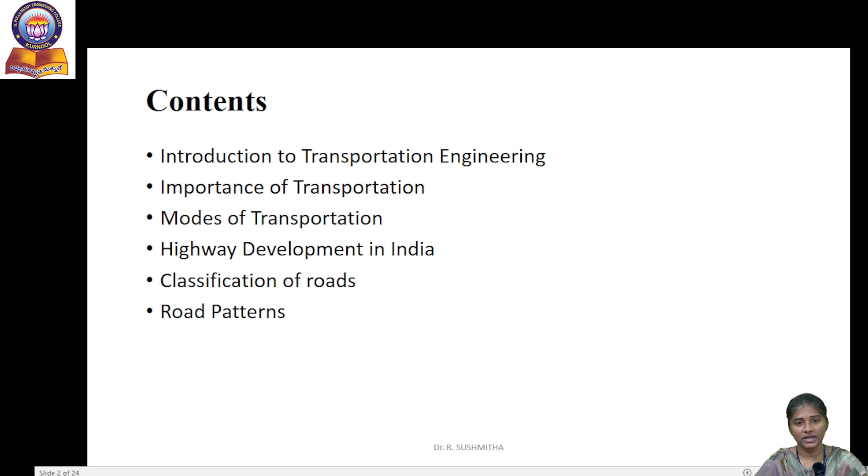These are the brief contents which we are going to discuss today: Introduction to Transportation Engineering, Importance of Transportation, Modes of Transportation, Highway Development in India, Road Classification and Road Patterns.

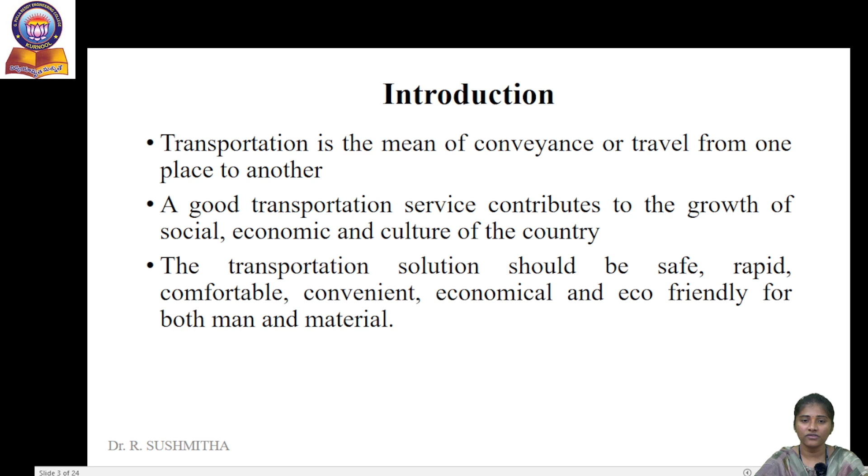Coming to introduction, transportation is the mean of conveyance or travel from one place to another place. A good transportation system can improve social, economical and cultural development of the country. It must be safe, rapid, comfortable, convenient, economical and eco-friendly for both man and material.

Coming to importance of transportation, transportation system will help us in carrying raw materials. It will help us to distribute the goods to the customers. It enhances the standard of living.

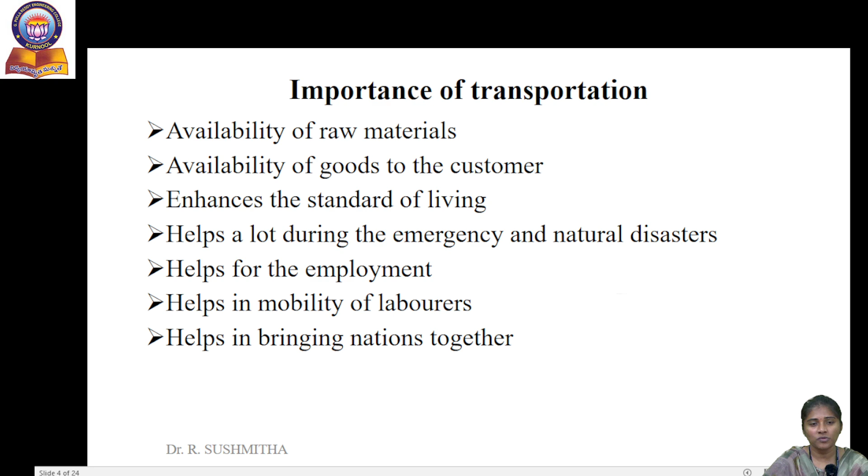It helps a lot during emergency and natural disasters. It helps for employment, that is, this transportation system will provide employment for various people such as drivers, conductors, and for various people involved in vehicle making. It helps in mobility of laborers and the transportation system helps in bringing nations together.

Coming to different modes of transportation, we have three types: the first is land transportation, second is water transportation, and third is air transportation. In land transportation we have roadways and railways. Roadway is the most important mode of transportation, which can be further divided into vehicular and non-vehicular transport.

Vehicular transport includes cars, trucks, buses, lorries, auto rickshaws, bullock carts, tangas, hand carts, etc. Non-vehicular transport includes animal-drawn vehicles like camel, dogs, elephant, horse, etc.

Next we have in land transportation system, the railway transportation system, which accelerated both commercial and industrial development of the country. In India, it is the principal means of transportation, carrying 80% of the goods traffic and 70% of the passenger traffic.

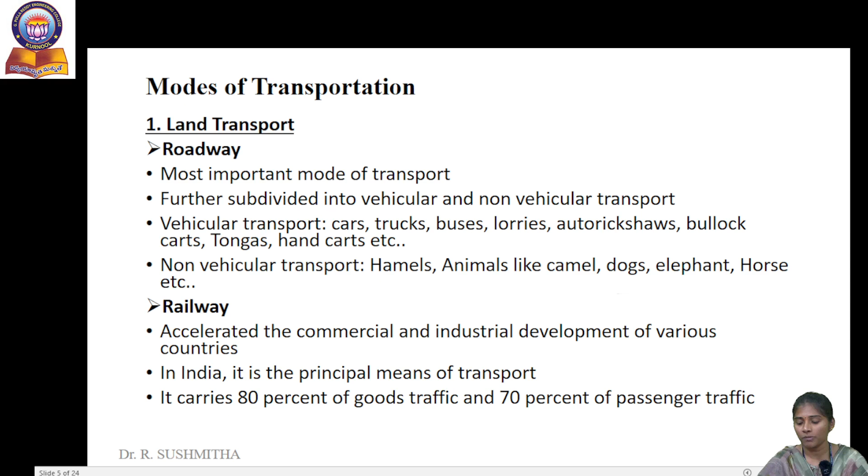Next we have water transportation, which is the cheapest and oldest transportation system. The cost of running is also less. It may be further classified into river transport and ocean transport.

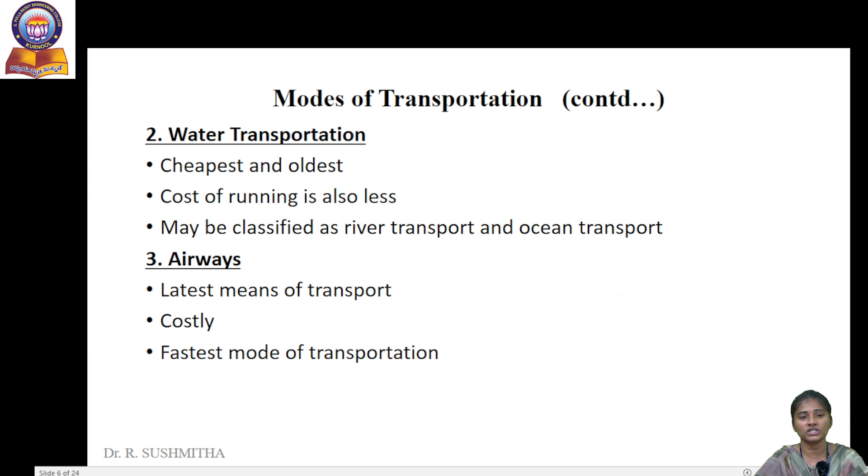Next we have air transportation system, which is the latest means of transportation, very costly and the fastest mode of transportation. So next we see highway development in India.

There are some important events in highway development in India, which we discuss one by one. The first one is Jayakar Committee recommendation, which was formulated in 1927. According to Jayakar Committee, the following are the recommendations given.

The first recommendation is that road development be considered as a matter of national interest. This committee recommended an extra tax to be levied on petrol from road users to develop a road development fund, which is called the Central Road Fund.

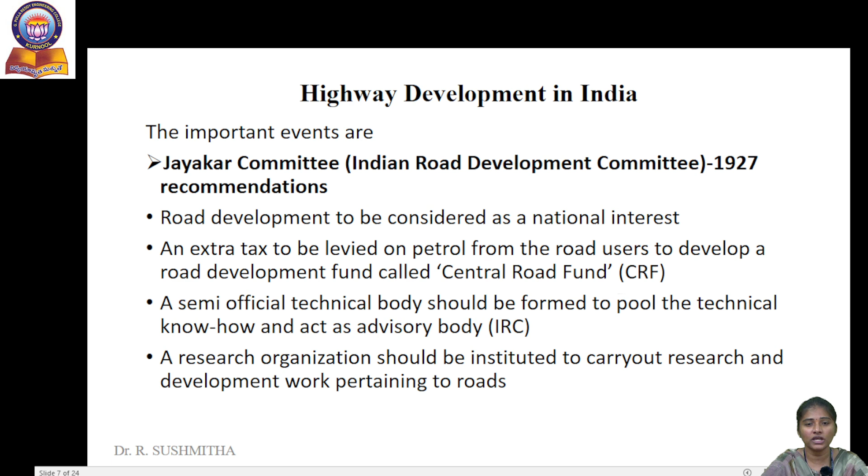A semi-official technical body should be formed to pool the technical know-how and act as an advisory body, which is the IRC, Indian Road Congress. Next, a research organization should be instituted to carry out research and development works pertaining to roads. These are the Jayakar Committee recommendations.

Next event is the Central Road Fund, CRF, formulated in 1929. According to CRF, consumers were charged an extra levy on petrol at a rate of 2.64 paise per litre in 1929.

This levy was revised in 1998 and increased by rupees 1 on petrol and rupees 0.5 on diesel. According to CRF, 20% of the annual revenue is to be retained as central reserve towards administration, R&D on road and bridge projects of special importance.

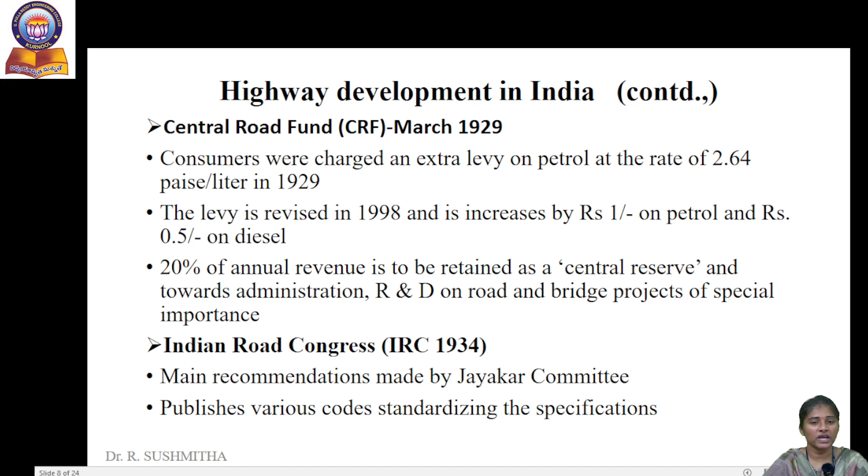Next event was Indian Road Congress, which was formulated in 1934. IRC was one of the main recommendations by the Jayakar committee. This IRC publishes various code books for standardizing the specifications.

Next event was the Motor Vehicle Act, formulated in 1939. It was introduced by the Government of India to regulate road traffic in the form of traffic laws, ordinances and regulations.

Next event was the Nagpur Road Conference, also called the first 20-year road development plan, which was formulated in 1943.

This first 20-year road development plan's scheduled duration was 1943 to 1963, but fortunately it was completed by 1961 only. According to the first 20-year road development plan, the roadways were classified into national highways, state highways, major district roads, other district roads and village roads.

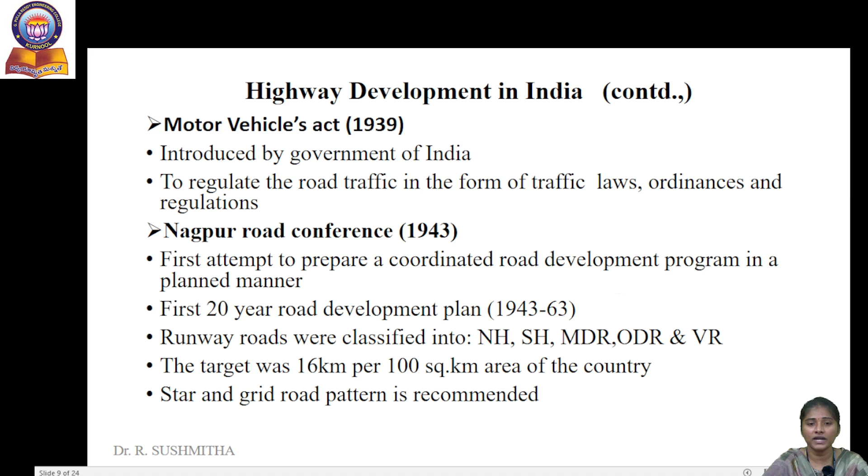The aim of this Nagpur Road Conference was to construct 16 kilometers length of road per every 100 square kilometer area of the country. In this Nagpur Road Conference, star and grid road pattern was recommended.

The next event was the Central Road Research Institute, CRRI, which was formulated in 1950. It was started at New Delhi to carry out research regarding road technology. It was one of the main recommendations of the Jayakar committee.

The next event was the National Highway Act, in 1956. The aim of this National Highway Act was to declare certain selected highways as national highways, and to enter into any land for carrying out surveys, to acquire land and take possession for the development of national highways.

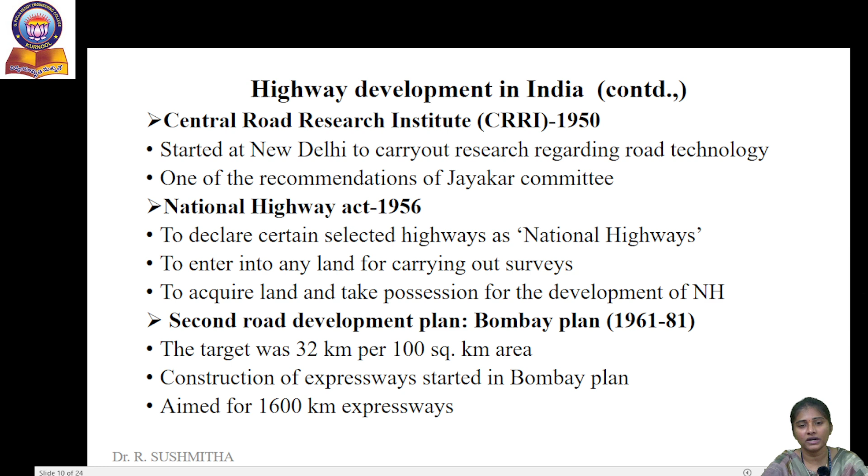The second road development plan, also called the Bombay Road Plan, had a scheduled period of 1961 to 81. The aim of this plan was to construct 32 kilometers length of road per every 100 square kilometer area, and the construction of expressways started in the Bombay Road Plan only. The aim of this Bombay Road Plan was to construct 1600 kilometers of expressways.

The next event was the Highway Research Board, that is IRC 1973, which gives proper guidance to road research activities in India. The last event was the third 20-year road development plan, also called the Lucknow Plan, scheduled for the period 1981 to 2001.

The aim of the third 20-year road development plan was to construct 82 kilometers length of road per every 100 square kilometer area, and it was aimed at construction of 2000 kilometers length of expressways.

This third 20-year road development plan gave us formulas for calculating the length of national highway, state highway and major district road. If you want to calculate the length of national highway, it can be calculated as area in kilometer square divided by 50.

If the length of the state highway needs to be calculated, it can be calculated as area in kilometer square by 25, or 62.5 into number of towns. The length of major district road can be calculated as area in kilometer square by 12.5, or 90 into number of towns.

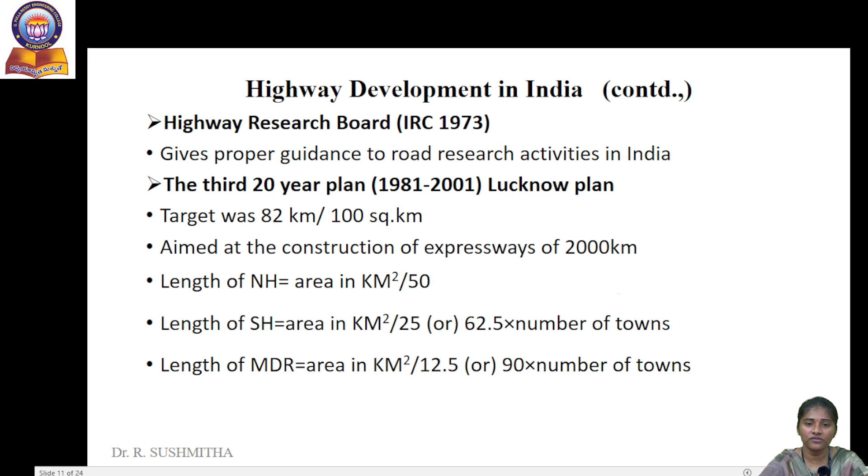So this is about highway development in India. Next we see briefly the classification of roads.

We classify roads based mainly on three criteria: based on the season during which the roads are used, based on the carriageway provided, and based on whether surface finish is provided for the pavement or not.

The first criteria is based on the season during which the roads are used, that is based on usage. Here the roads are classified as all weather roads and fair weather roads. All weather roads are the roads which can be used during all weathers in the year. Metalled roads, which are made up of cement, concrete or bitumen of coal, can be used during the rainy season also.

Fair weather roads are the roads which are negotiable only during fair weather. There will be interruption to traffic throughout the rainy season at major rivers and streams, where the flow crosses the river.

The next criteria is based on carriageway. Based on carriageway, roads are classified into paved roads and unpaved roads. Paved roads are the roads which are provided with a hard pavement course; examples are stone, waterbound macadam roads, bituminous macadam roads, and concrete roads. Unpaved roads are the roads which are not provided with a hard pavement course of at least one WBM layer; examples are earthen roads and gravel roads.

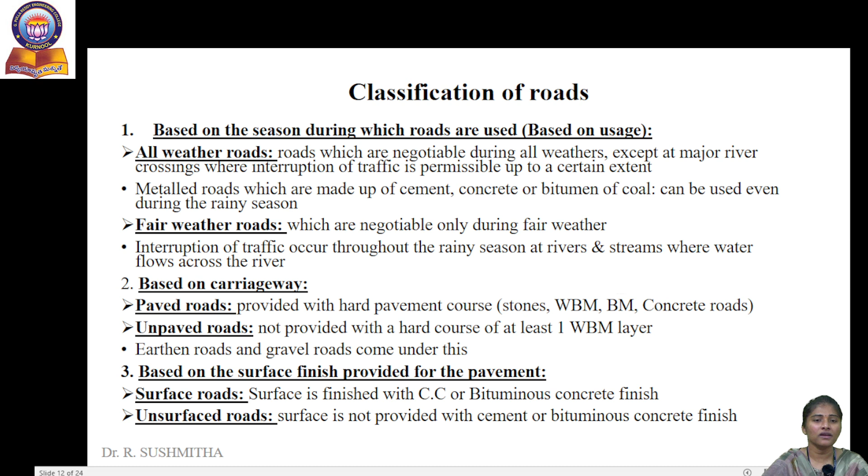The third criteria is based on whether surface finish is provided for the pavement or not. They are classified into surfaced roads and unsurfaced roads. Surfaced roads are the roads where the surface is finished with cement concrete or bituminous concrete finish. Unsurfaced roads are the roads where the surface is not provided with cement or bituminous concrete finish.

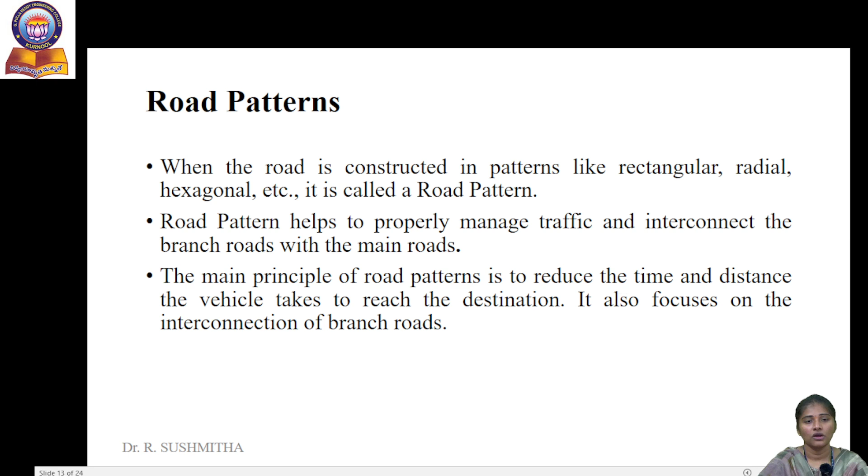Next topic is road patterns. Whenever a road is constructed, we construct the entire network into some pattern like rectangle, radial, hexagonal, etc., which is called a road pattern. This helps us properly manage traffic and interconnect branch roads with the main road. The main aim of road pattern is to reduce the time and distance the vehicle takes to reach its destination, and it also focuses on interconnection of branch roads.

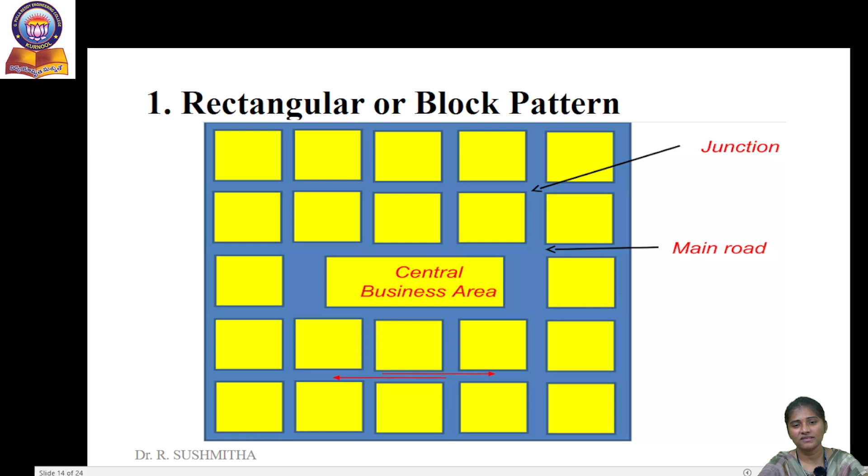We see different types of road patterns here. The first is rectangular or block pattern. In this type, the entire area of the city is divided into rectangles or blocks, where the branch roads or street roads intersect each other at right angles. The main road will be wider compared to the branch road or street road, and there will be main access to the central business area from outside the city.

The advantage with this pattern is the construction and maintenance of roads of this pattern are very easy. The limitation is this pattern is not very convenient from a traffic point of view, because at intersection points the vehicles face each other. For example, city roads of Chandigarh have rectangular pattern.

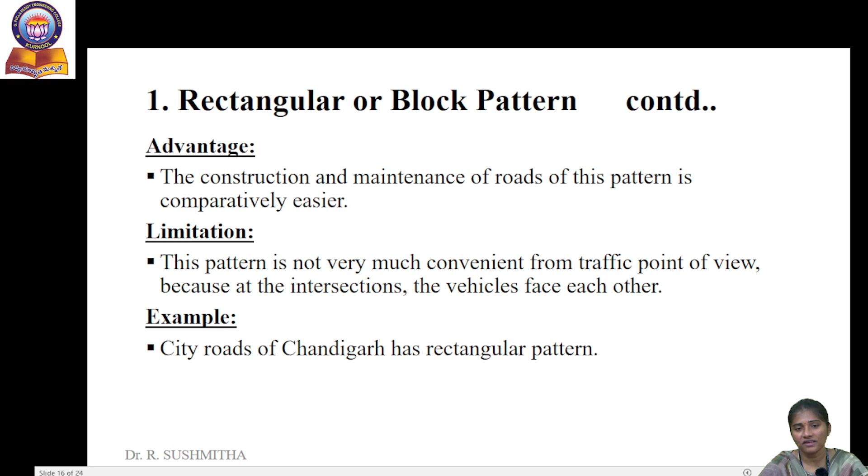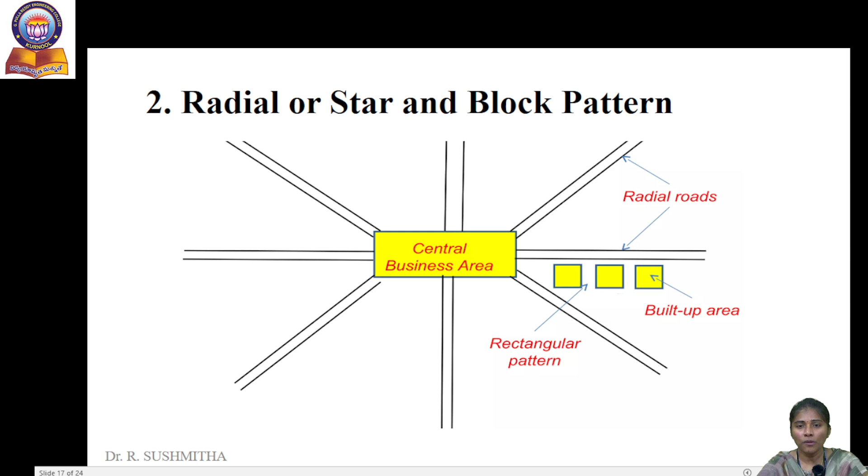Next we have radial or star and block pattern. Here the roads are radiating outwards from the central business area. The area between these radial roads is again divided into rectangular blocks.

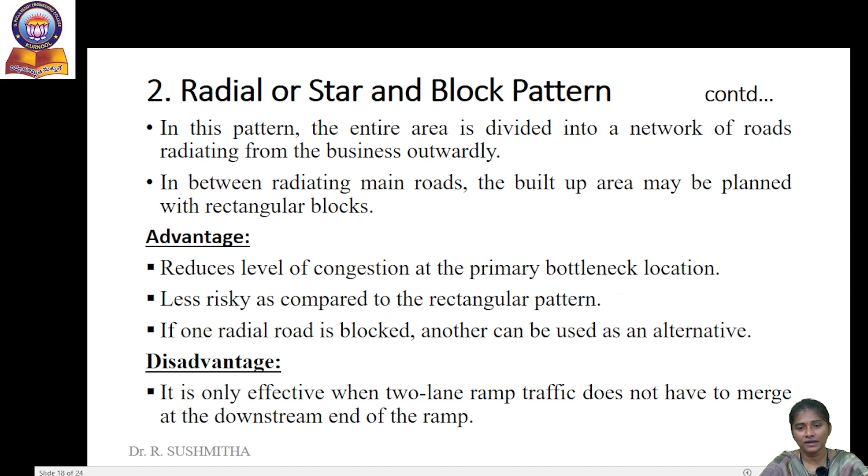The advantage with this radial or star and block pattern is it reduces the level of congestion at primary bottleneck locations, and it is less risky compared to the rectangular pattern. If one radial road is blocked, we can use another road as an alternative. The disadvantage is that it is only effective when two-lane ramp traffic does not have to merge at the downstream end of the ramp.

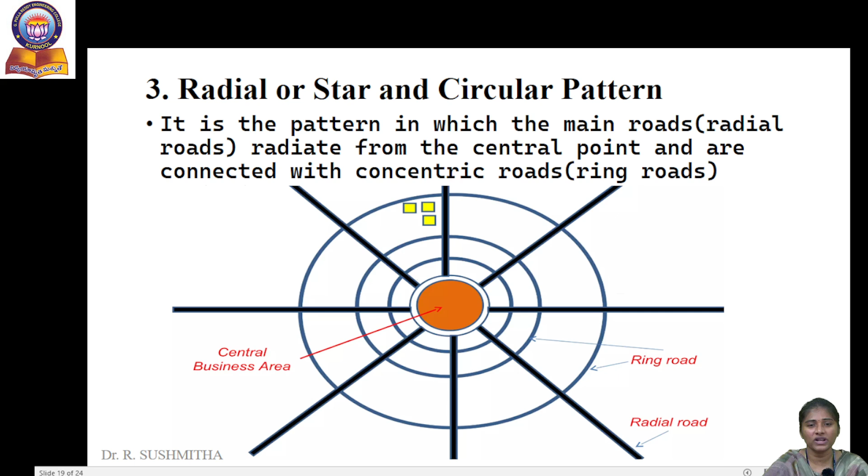The third one is radial or star and circular pattern. This is the pattern in which the main roads radiate from the central point and are again connected with concentric roads or ring roads.

The advantage with this type of road pattern is that it is safer compared to the above patterns, because vehicles travel in the same direction in this pattern. Using a circular pattern in place of traffic signals reduces the possibility of rear end collisions. The disadvantages are that more area is required for this pattern, and noise, air pollution, and congestion in the main business area may occur.

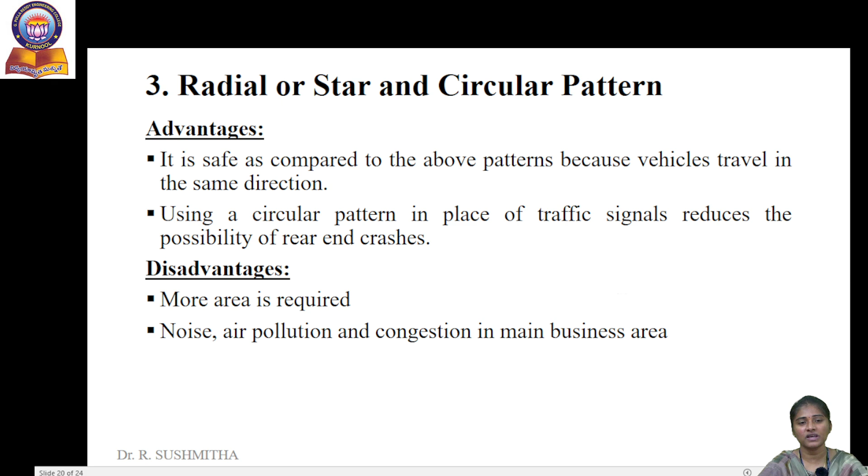The fourth category of road pattern is radial or star and grid pattern. This pattern is formed by combining star and grid pattern. As in others, a radial road network radiates outwardly from the center, then the main radial streets are again interconnected by providing a grid pattern.

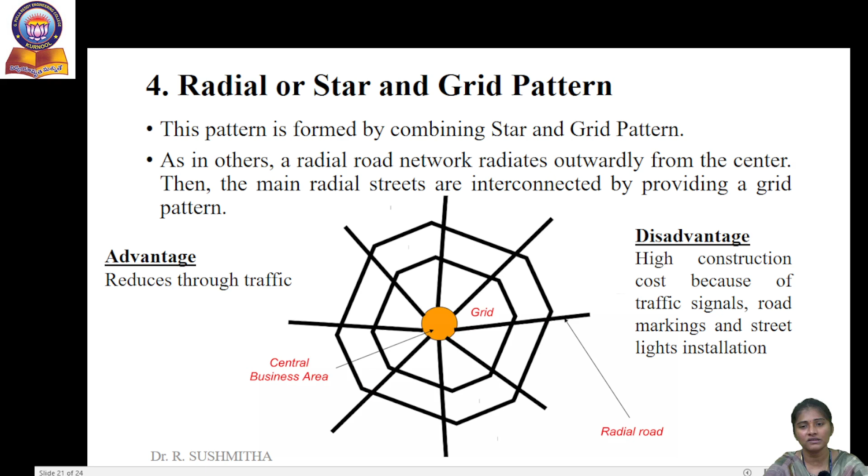The advantage with this pattern is it reduces through traffic. The disadvantage is high construction cost because of installation of traffic signals, road markings, and street lights.

Next we have hexagonal pattern. In this pattern, the entire area of the city is divided into hexagonal patterns. Three roads meet the built-up area boundary by the sides of the hexagons at every corner of the hexagon, which can be further divided into suitable sizes.

The advantage with this type of road pattern is accessibility to any road is possible. The disadvantages are that this type of road pattern is not suitable for cities as it requires huge land, and it is difficult to construct intersections in this pattern.

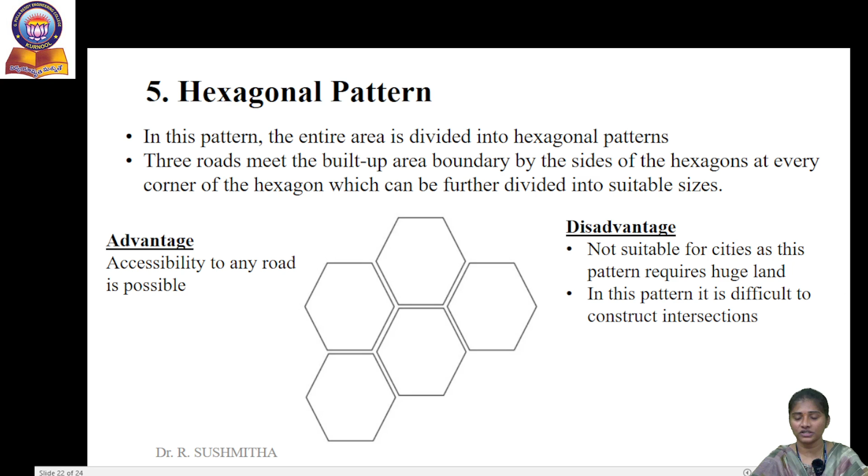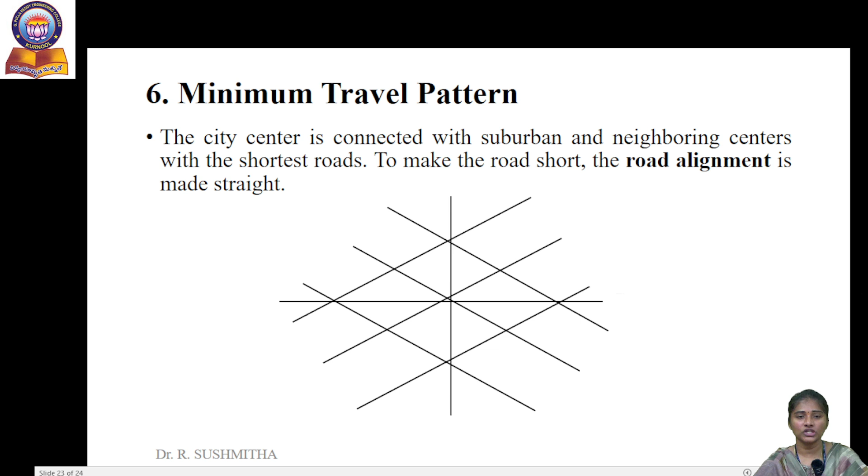Next we have minimum travel pattern. Here the city center is connected with suburban and neighboring centers with the shortest roads. This pattern gives us minimum travel time to reach from origin to destination. Thank you.